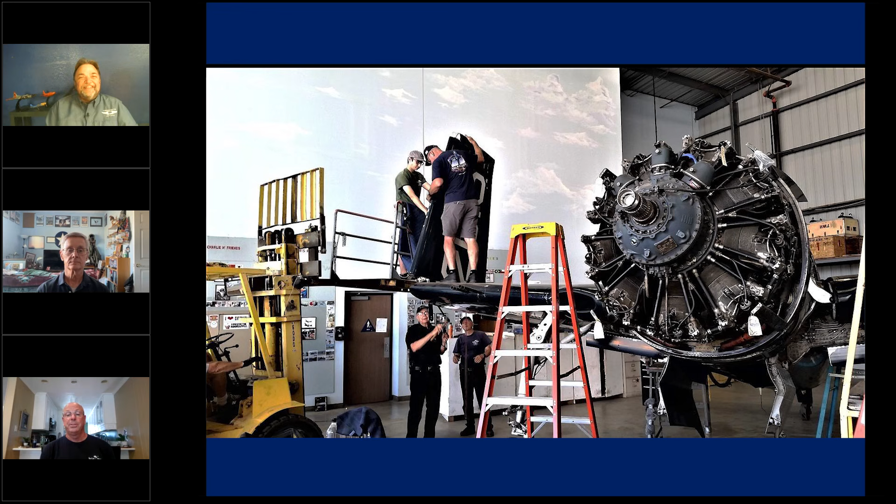So, well Robert, how about you? Steve, my last few years in uniform, I was in the Air Force. Got involved with the air show here in Las Vegas at a fairly decent sized Nellis Air Force Base air show. During that time, I just got smitten, like you wouldn't believe, with warbirds, since I was kind of on the ops side of the air show and dutifully involved. Through a string of successive years where CAF SoCal would bring in some of their fleet, I befriended them. On my flying side, I was able to get into part ownership of a T-6, so built up a lot of tail dragger time and warbird time. I volunteered back in 2010 with CAF SoCal, and have worked my way from whatever's needed - filling up oil jugs - into the fighter program and got some time in the Bearcat. Working through the airplanes that I have been able to fly down there, I really take great confidence in John's ability to solve problems and get the airplanes flying beautifully.

Good. What's it like to fly the Bearcat compared to some of the other fighters? Well, they all have their nuances and their joys. Not only is it an honor, but it's easy to fly. The way our unit does it, they kind of progress you through the fighters. So by the time you're strapping on a Bearcat, you're ready for the acceleration.

But thankfully, with technology and being experimental, you can actually build parts as long as they're like for like, and they meet engineering specs and so forth. But not structural members necessarily, other than sheet metal. But you can make these things go. And there still are parts available that you can find in the industry, unbelievably.

But with technology, with the engines, that's the biggest thing. If we didn't have technology to keep these engines going, we'd be dead a long time ago. That's really where the rubber meets the road, because these engines do wear out. And thankfully, we have nice support, in this case with the round motor. Anderson Aeromotive is a great asset to us, or Vintage V12s. In the case of V12s, they really make this thing happen.

These are really just, I call it a sideways helicopter. This thing is all engine. It's really a simple machine compared to, say, a corporate jet in grand scope, but that's where it lives.

And also the gear is probably the hardest challenge of all, because you're just not going to get gear parts. You have to keep fixing them and keep maintaining them. Thankfully seals are available, but the structural members are, I call it, unobtainium. It's just really, really difficult to find gear parts. So that's probably the best answer to your question. But there's a myriad of challenges, depending on what is failing and what you need to do.

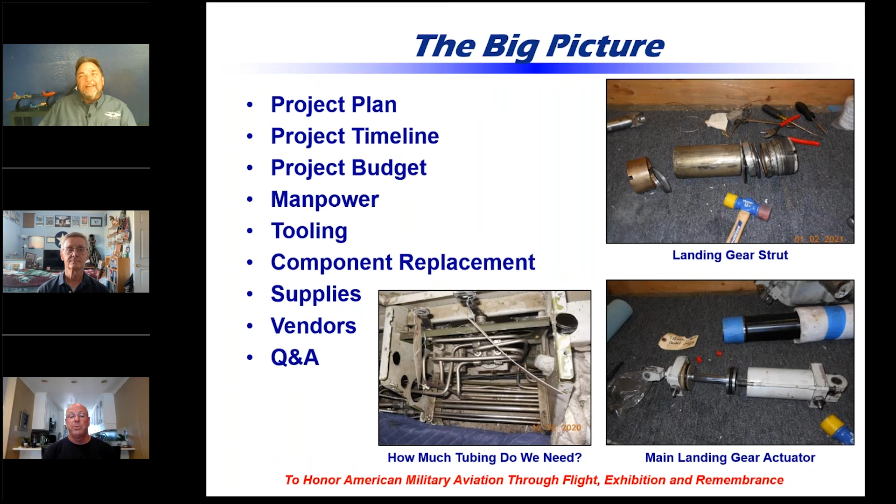So what you're saying is it's a typical restoration. Once you peel off one piece, you find something else that needs to be fixed. Yep. You keep going, and the more you peel, the more you find. Thankfully, we have not found corrosion. Of course, when you cover it with oil constantly, it's hard to get corrosion. And it's always hangared, so that's the other good thing. I've seen other folks have corrosion or bent spars or other bigger problems, which we don't have, thankfully. So that's the great news. I don't have to go that far down.

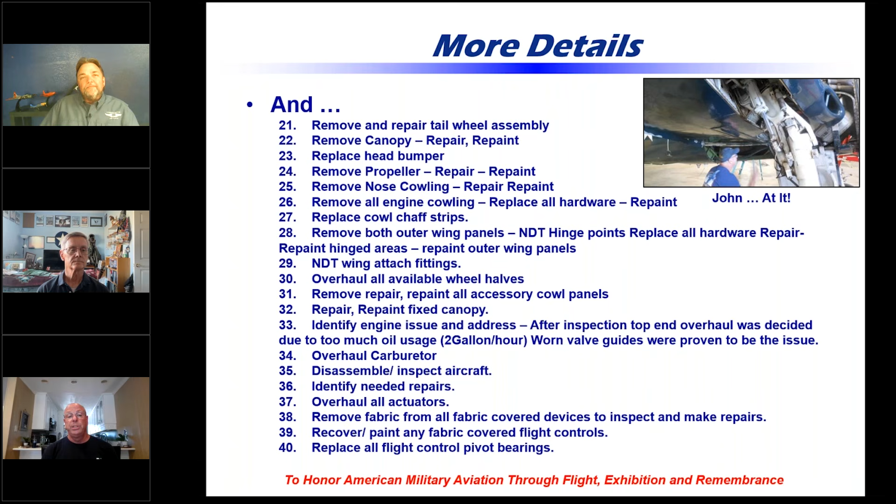Well, we're looking now at the details of all the things that you're planning on doing. What's the timeline for the restoration? You've already been at it a couple of years. Everybody wants to ask me, when's it going to go? Believe me, I'm the first one that wants it to go. The problem is we're a volunteer organization. I need help. We have a big manpower problem. That's why I'm crew chiefing 4+ airplanes and maintenance officer. You really need an A&P license to crew chief an airplane, to be the leader of the project. And we're lacking those folks, but we need everybody.

I could use anybody. That's the other reason for coming online with you guys, to see any interested folks. I can teach anybody anything, and don't worry if you don't have any experience. We'd love to have you and get you knee deep in these airplanes, in whatever flavor you want to take it. We need everybody, even if it's not maintaining it, media, you name it.

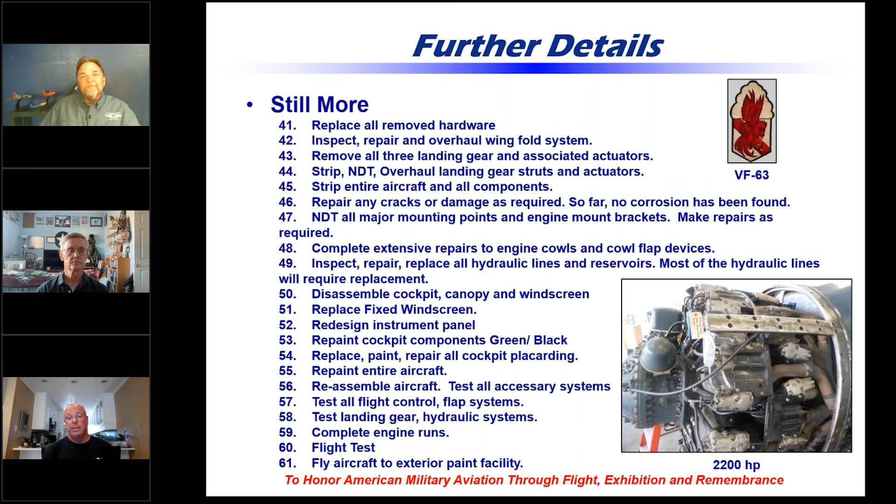We need help. And to answer your main question, right now I'm repainting everything. We only have a couple of painters that are part-time, and without it painted, you can't really put it together. So that's what we're up against. We have a lot of stuff done, but we've still got a long way to go. That's probably the toughest mountain right now: in order to reassemble, I've got to have things stripped and repainted. We've stripped most everything, but the repainting is going very slowly. I love the guys that do it, they're giving all they can.

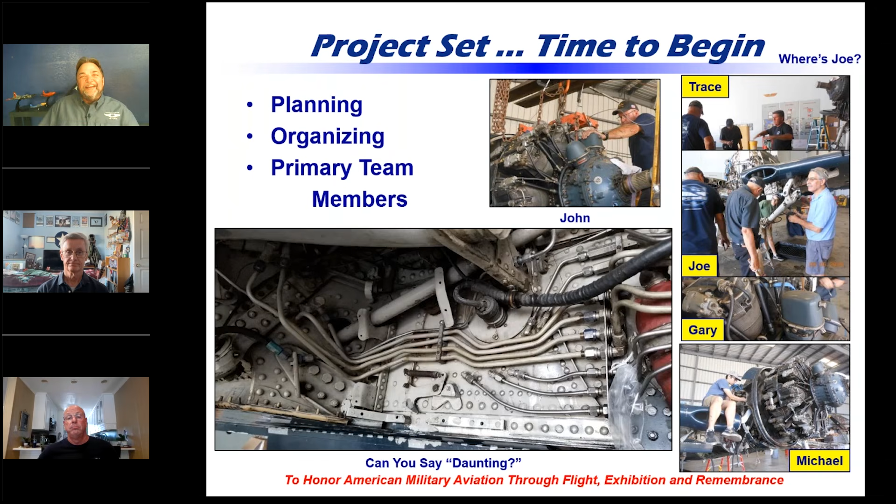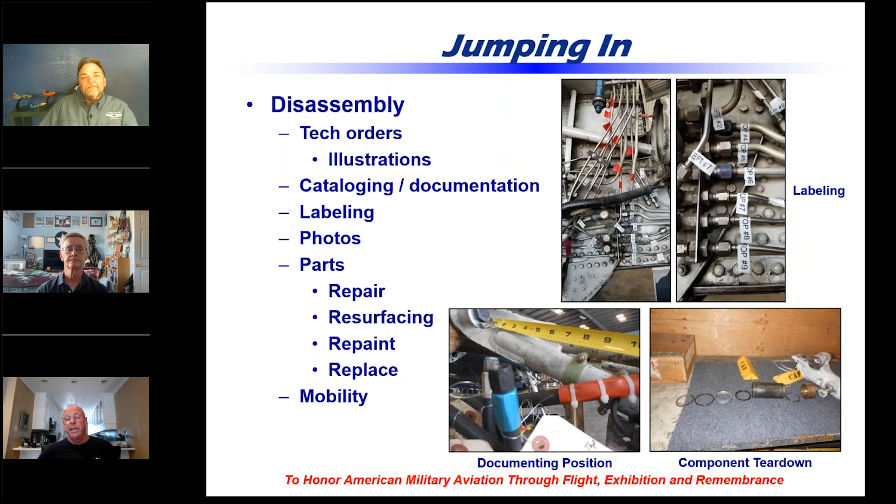People come from all over, and it's just however big your passion is. I'm about 90 miles away myself, so I either drive up or fly up. That gives you an idea how big my passion is for CAF and working on these extremely rare machines. Many of our airplanes, there's a handful or less existing in the world, and sometimes only a couple even fly, and we take pride in that all of our stuff flies. That's very important. Honestly, I wouldn't be interested if it didn't.

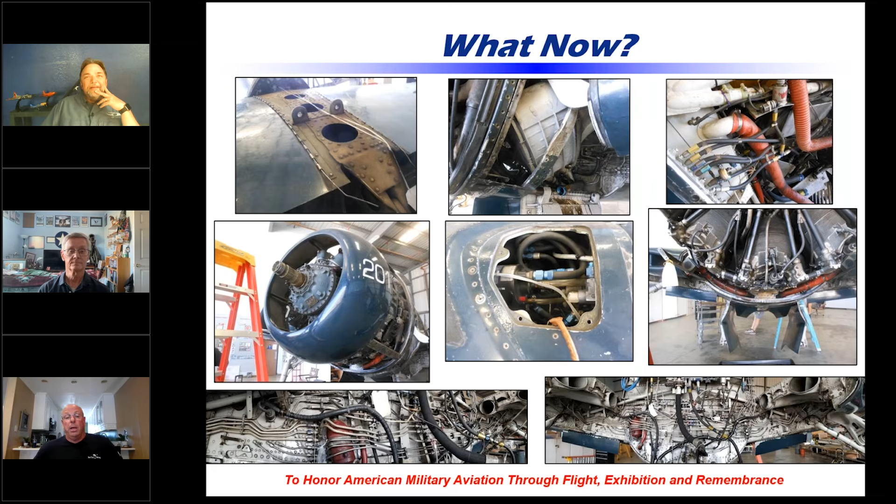Any idea how many feet or thousands of feet of tubing go into the plumbing of this airplane? Oh, I'd have to guess. I haven't added that up, but we've gone in and replaced a lot of it. In fact, my standard is we're going with stainless. Anything we replace is going to be stainless, it's more rigid, but it's going to hold up a lot better than the aluminum.

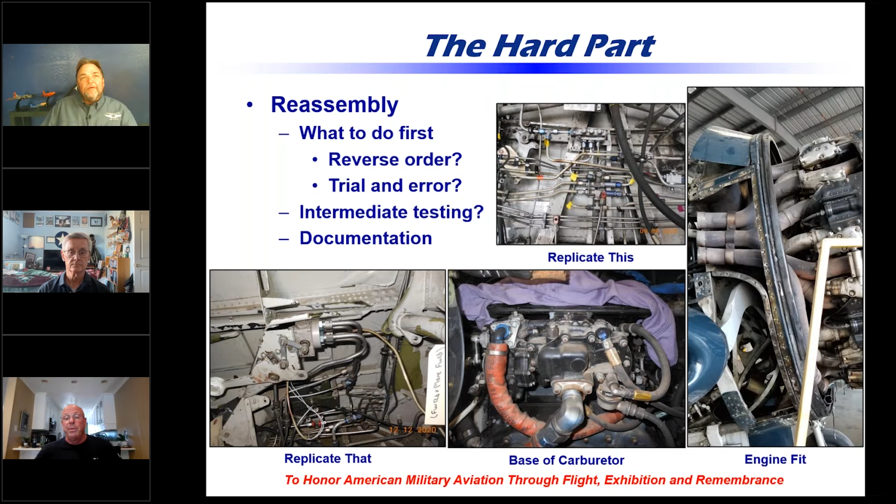I'm not going to replace all of it just because it's just too daunting. So if the aluminum pipe is in good condition, which is honestly pretty rare, probably only 10% of those are going to remain on. Those are usually the thicker ones or the bigger ones that are holding up. The smaller ones, just remember, this is a sideways helicopter, so it vibrates to high heaven, and that's why. And she's tired and old, so she needs a lot of love, and we're giving it to her.

So there we are, and there's me with the engine, but we're taking accessories off the back of it before it went out for overhaul. And then you see the brakes there that haven't been removed yet, but the cockpit's completely empty, which we had to strip and paint as well. So that's about to go back together.

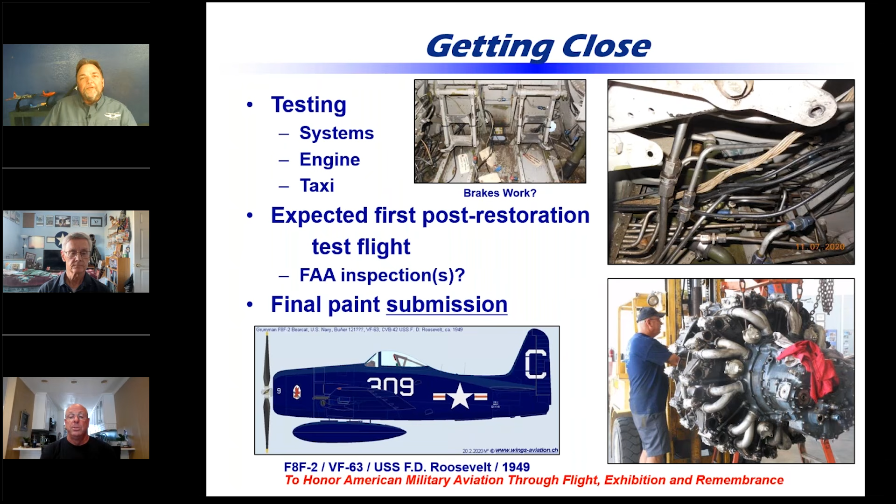That's finally painted. About how long of a lead time is there for the engine rebuild? The engine took, you'd be surprised how quickly it goes because, like I said, the support we have from Anderson Aeromotive, it's about 6 months, typical, 6 to 8 months, depending on how much they have to get into it. But these big round engines, you can take all the jugs off and replace anything. It's much simpler. In fact, we just had to replace one of the jugs on the Hellcat to rescue it from Livermore because we had a big problem with it. So it just took a few days to do that.

So versus say a V12, it's a lot more involved, to put it lightly, on a V12. But it's because you can actually remove the whole section, it's much simpler in the grand scope.

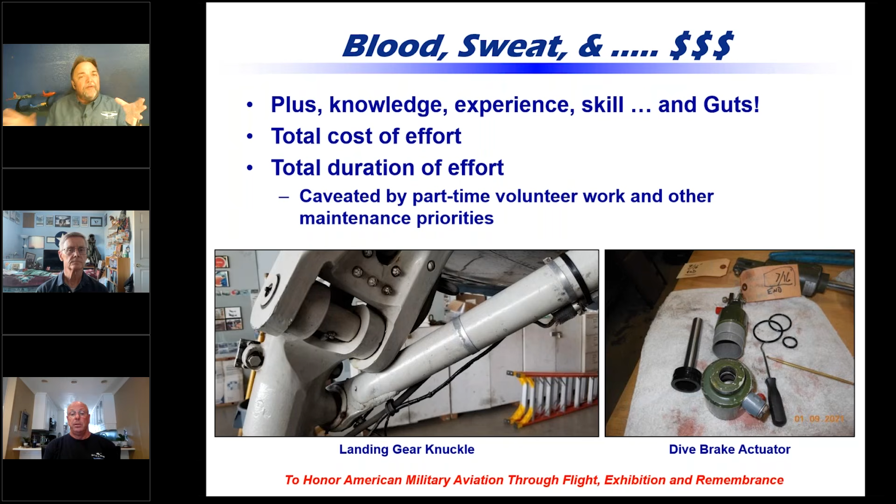It's twofold. Right now, I'm asking for approval to overhaul our carburetor, and that number is about $12,000. Because that's just something you have to do when you do this kind of effort. And then, as you can imagine, there's a myriad of nuts, bolts, seals. We got to replace all the cabling. It just goes on and on.

Actually, I'm going to redesign the whole instrument panel because, again, with modern technology, we don't need a lot of the old instruments anymore, because you get, say, one AV30, you're going to upgrade the radio and the transponder, but we already have ADS-B on it, but you really only need probably less than half. You just use your primary instruments, your airspeed, altimeter, vertical speed, on and on, just the standard primary stuff, slip-skid ball, that sort of thing.

But we mostly navigate by GPS, so the days of VOR are kind of gone. But that's what we're going to go with, and end up with an iPhone mount instead of all the rest. So ForeFlight is a very effective tool. So that certainly is. Yes.

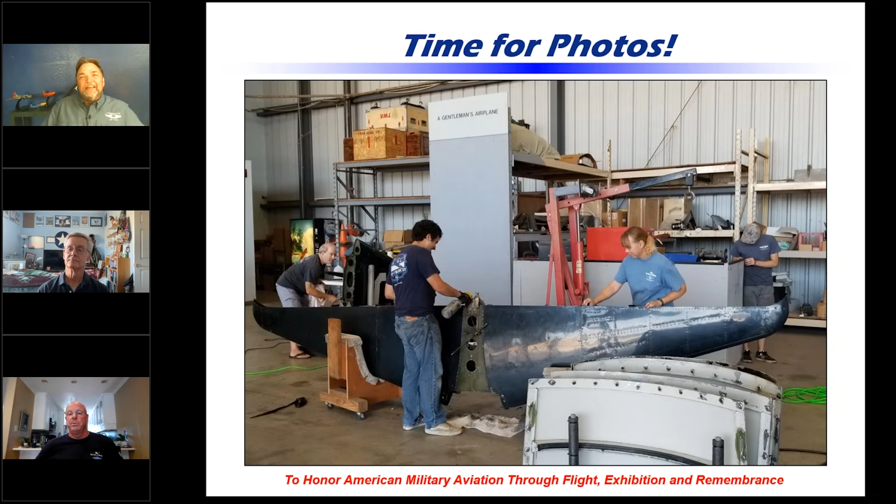Most people go with that. That brings up a question too: when you're doing the restoration, I mean, you want it to be as authentic as possible, but yet there are some more modern avionics, for instance, brake systems, things like that. What are some of the more modern, not concessions, but upgrades that you're taking into consideration for the airplane?

I'm going to upgrade the fire extinguishing system. It had an older style halon system, and we're going to use a jet style. We're going to have two shots for the accessory bay. And it's kind of a globe bottle, which I've seen quite often in the corporate jets, which is exactly what we're going to use. We've got a great company we're working with, which is donating the bottles, but we have to pay for the charging and the squibs and so forth.

And also there's like a softball sized bottle for the cockpit if necessary. So a lot of safety incorporated, and this is going to upgrade from a mechanically actuated to an electrically actuated fire system, which is going to be a really nice safety feature. And the rest of the upgrades are just going to be cockpit related. As far as other upgrades go, like I said, we're going to replace the aluminum with stainless tubing as applicable.

We're doing a lot of nice repairs to, say, the inside of the gear where we had to replace components and stuff. For example, the outer wing panel door locks: when you fold the wings down and lock them in place, those pins were very worn, so we had to machine new ones to make it lock appropriately, to be safe, like you're supposed to. But I wouldn't call those really upgrades; they're just more repairs and fixes and so forth.

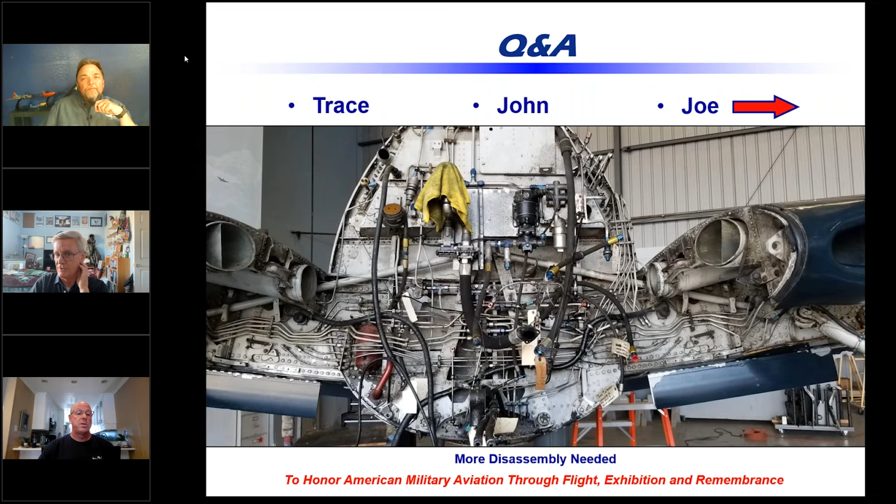Okay, I have an answer for your question. Last time it flew, it had about 2,260 hours on it. That's a pretty impressive number of hours. Even though it's an 80-year-old airplane, it's not something that you fly every day. So that may not be its entire history. This is how it goes in documentation on these. It comes down to your calculations, and that's really it. Sometimes documentation is lost and you don't know. But that's what we know.

Okay. Tell us a little bit about the paint scheme that we're looking at. Again, this is the VF-63 paint scheme from the Fighting Redcocks when they were on the Roosevelt. And that's why I'm proposing this, because it's my connection with the squadron. I'd love to see it painted that again, but there's a lot of other folks that have some other ideas, so we'll see how that shakes down. We're not very close to painting it yet. We're gonna fly it to a paint facility when that time comes.

Right now it has a dark green primer on most of it, and that's the way it's going to fly away to paint. I'm sure there'll be a lot of other proposals in the queue as well, besides mine.

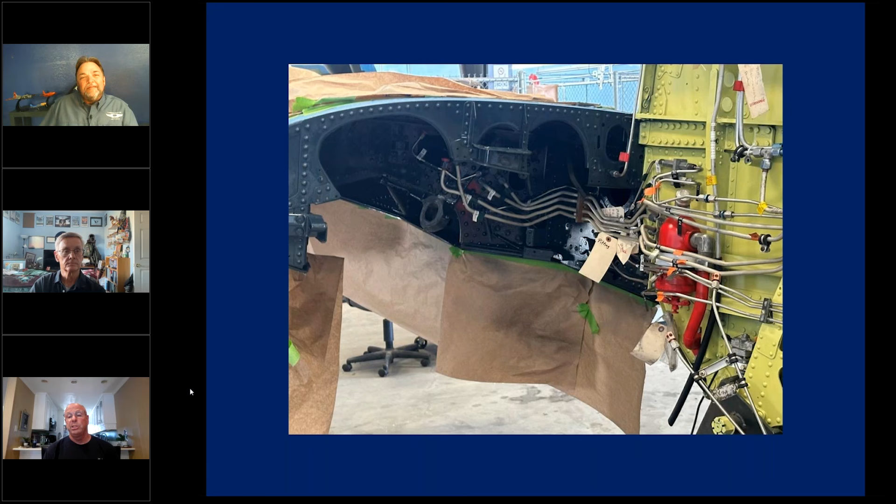Well, I wanted to get down to the firewall because I knew the plumbing was very suspect, and in order to repaint and strip the firewall, you have to gain access to it. So all that plumbing had to come down, and you can see the red tank up there is a hydraulic tank. That's also been, as you can see, completely overhauled and redone. It's like any other restoration you might see.

In front of that will be the oil tank, and the other components that live on the back - there's a big electrical panel that goes on there too, which we're prepping now. The only thing I really didn't do was the fuel tank - I did not remove it. It's a fuel bladder, but it wasn't very old, so there's no reason to dive into that. I think we're in good shape there.

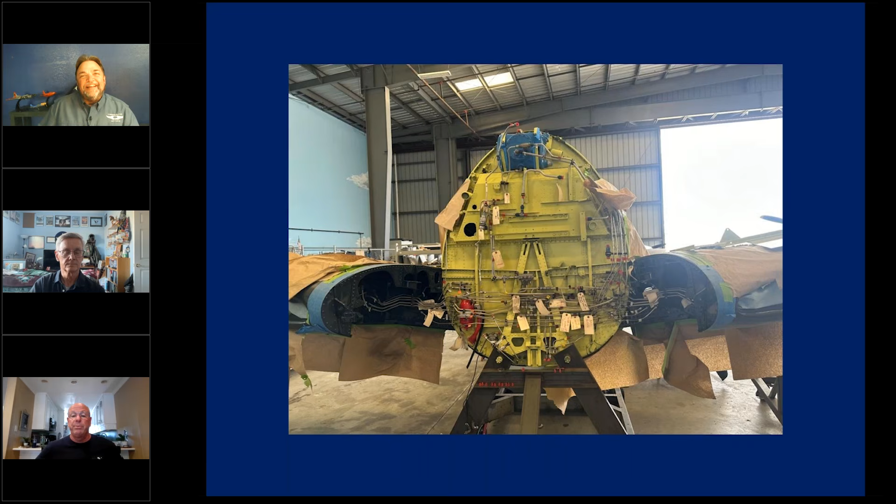Earlier you had mentioned that the stabilizer was off and now it's back on. Right, so you can see the vertical stab and the horizontal stab are installed permanently, and you can see the gun bays are open. Which I don't know if the viewers know - typically, when we go to air shows, we use those for our luggage.

The Hellcat's got a much bigger opening, so we only put a little in the Bearcat, which is really 5,000 pounds lighter than the Hellcat. I don't know if folks are aware of that. But obviously missing the outer wing panels, which are actually pretty well complete, and I just need to put the linkages on the ends there before we can install those.

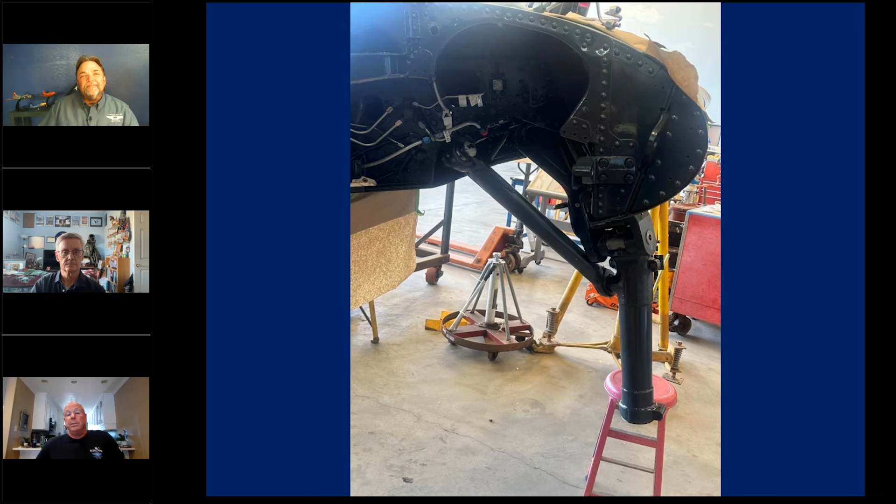I'm actually very close to installing the rest of the gear. I really want to get it back on its legs very soon, and that's been my focus, as well as the aileron linkages. There you can see half of the gear legs installed, and we're again very close right now to putting the rest of it on. We've just got done building up the wheels, so those are ready to go.

So basically, how many airplanes do you have, Rob? 13 or 14 airplanes that all fly, and a small handful that are non-flying and may stay that way, just because we have other priorities. Exactly. So we have to weigh things and see which ones can go or not. Of course, we always want to have them all go, but there's only so much you can do.

But I think we did pretty well in the air show. I think this was the only one. This and the Spitfire are the only ones that didn't fly in the air show.

Oh, and mentioning the air show, for those who don't know, Southern California Wing has hosted an air show at the Camarillo Airport for, well we were trying to figure out how many years, but it's been more than 20, probably closer to 30 years, at least.

And so maybe just tell us a little bit about what happens during the show. You want to take that, Rob? Sure.

To be correct, it's not really the CAF's air show. We're just there - it's our home field. They have a little LLC that runs it every year and plans it, and then they put together all the stuff for the statics and the vendors and what they want in the flying schedule, and then they tell us what airplanes, and we go back and forth. We have CAF members who are advisors or actually sit on that planning staff and give them our ideas and work things out.

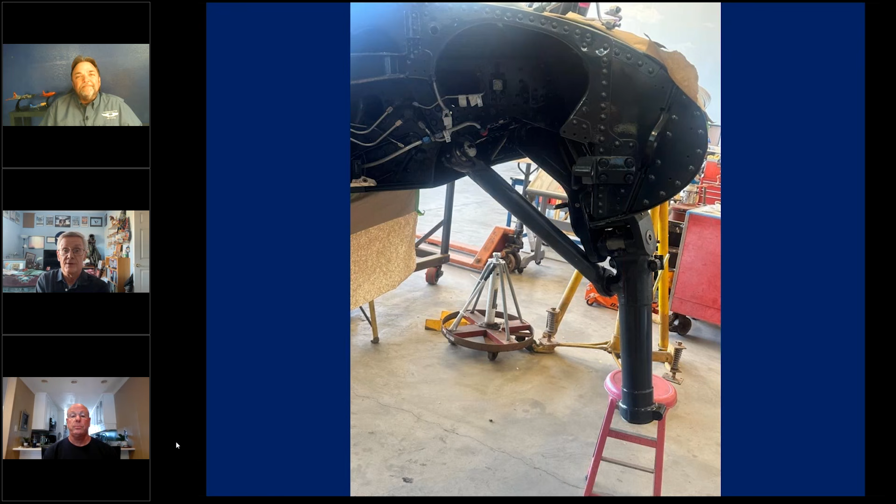And then, since we're Warbirds, we typically get the responsibility to put together the segments - they'll have a Pacific theater segment and a European theater segment. We typically put together the choreography for what those different airplanes are going to do during those segments. And then we'll brief it up with the other airplanes, because this group will reach out to other Warbird museums in the SoCal area and put together a really phenomenal history lesson covering pretty much the entire breadth of World War II, as best you can do in a 2-day air show.

What are some of the other things that the unit does during the rest of the year? I mean, you've got the airplanes, obviously, and a lot of maintenance, but you have a museum as well.

You bet. So we now have 3 hangars. One of them we call the museum hangar, and we have a nice little relationship we've developed with the Ronald Reagan Library folks, who are obviously a professional staff at putting stuff on display in the library there. So we've built a bit of a relationship - we gave them some of our toys to put on display, and they've helped us out as we've remodeled our museum. That includes not only airplanes, which we kind of shuffle in and out of the museum, but artifacts and displays and photographs and all the historical stuff that you would expect in a World War II museum.